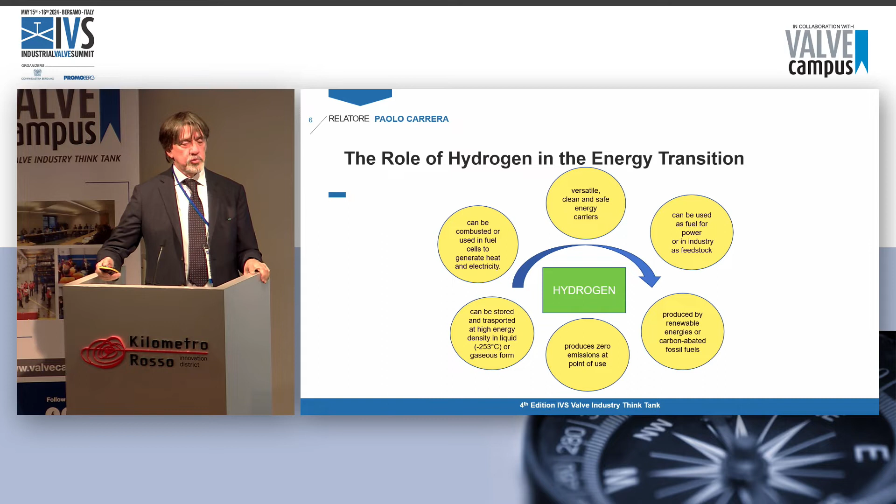It can be used either as fuel or as feedstock by the industry. It can be produced either by renewable energies or by carbon-abated fossil fuels, methane, which is associated to CO2 abatement. It does not produce emissions at the point of use. It can be stored, it can be transported. It's highly efficient, both in gas and in liquid form. Finally, it can be combusted or used in fuel cells to generate heat and electricity, which means hydrogen is highly versatile.

Now, let's take a step back and go back to the net zero scenario. Right now, we are producing 94 million tons of hydrogen, and less than 1% is low emission H2. We want to double production, reaching 180 million tons, but the big challenge will be making sure that 50% of this production is low emission H2 production.

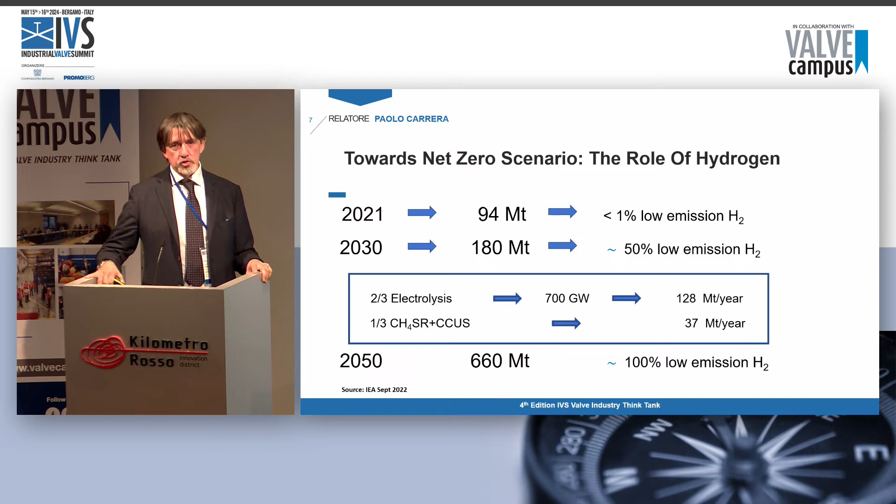This slide shows some of the challenges we have on the hydrogen market. So 180 million tons will be produced. 2/3 of it will be produced by electrolysis, and 1/3 of it will be produced differently. The electrolysis will lead to 700 gigawatts of installations. Right now, less than 200 megawatts have been installed across the world. The last line shows the 2050 targets, which means 7, 8, 9 times the current hydrogen production, and by 2050, all hydrogen should be green hydrogen.

Very ambitious targets indeed, but we must also boost demand. Decarbonization will be incentivized by increasing the production of hydrogen. Hydrogen access should also be boosted by creating the right infrastructure.

End users will have to be enticed to make use of hydrogen. And of course, costs will have to be reduced. We need economies of scale to make sure that this new form of energy is compatible with current methane costs. What can the government do, and what's the role of the private sector?

Well, first of all, governments need to boost this energy transition by enforcing different types of mechanisms. For example, financing plants, or reducing taxation, or increasing taxation on CO2, reducing taxation of hydrogen.

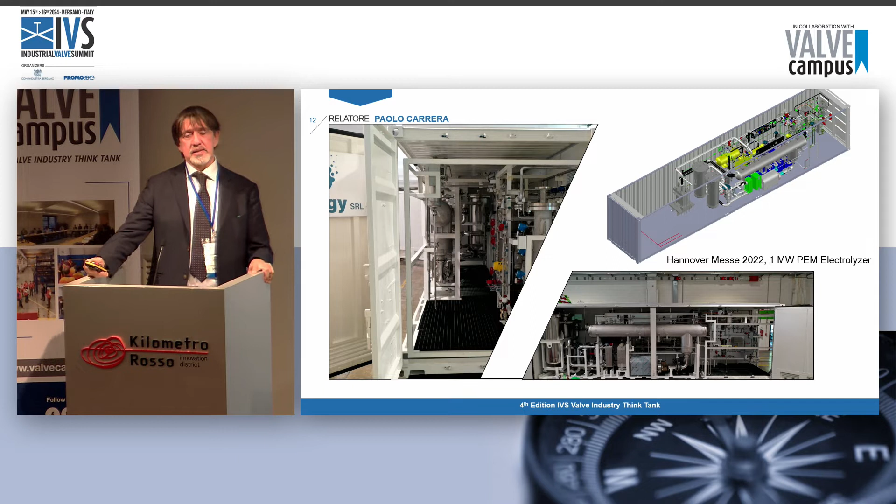Well, I'd like to tell you that we are investing a lot in research and development. We have a highly advanced hydrogen laboratory, probably the most advanced that we have in Italy. We aim at innovation. We do catalyzers, membranes, we study materials. One thing will be blending with methane, but another thing will be producing materials that are compatible with hydrogen. We were among the very first to take an electrolyzer, a PEM-based electrolyzer, to the Hannover Messe, which is the reference exhibition in the industry.

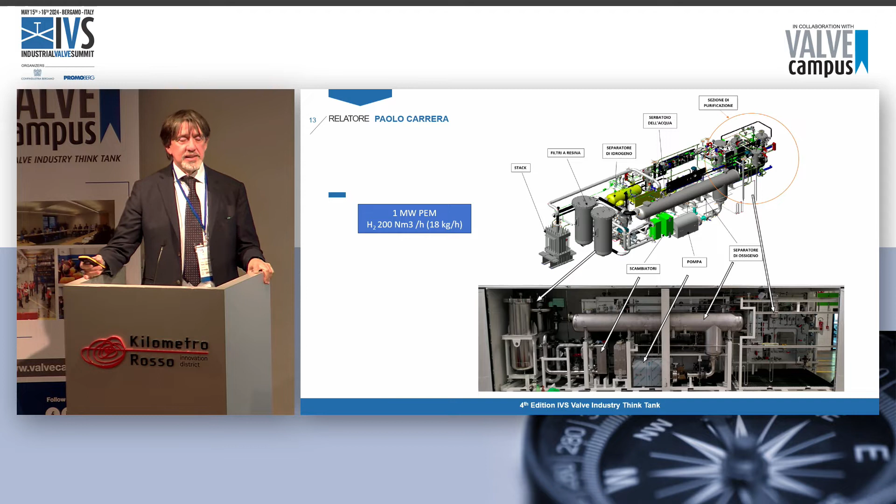This slide, well, I am not going into too many technical details, but we know that the most consolidated technology is the alkaline technology. But then you also have the PEM technology. We are investing in a halfway technology, taking the best of both worlds.

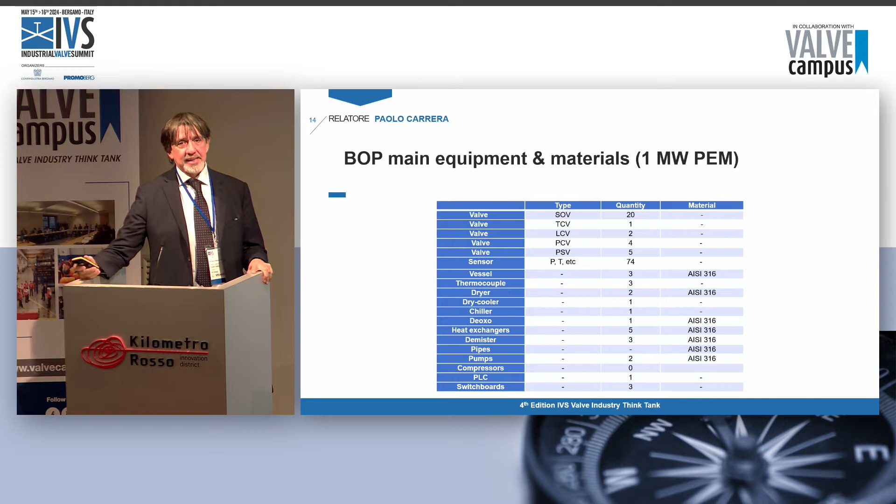Well, in this slide, you can appreciate how complex a PEM piece of equipment is. A normal, traditional plant can fit a 40-foot container. You can see that you have every type of valve, actually, in big quantities. This refers to 1 megawatt, 1 PEM megawatt. You see everything, thermocouples, chillers, deoxo, heat exchangers. So you see how complex it is. And you will also appreciate the fact that we're talking about noble materials. We know very well that hydrogen-based plants can be quite aggressive.

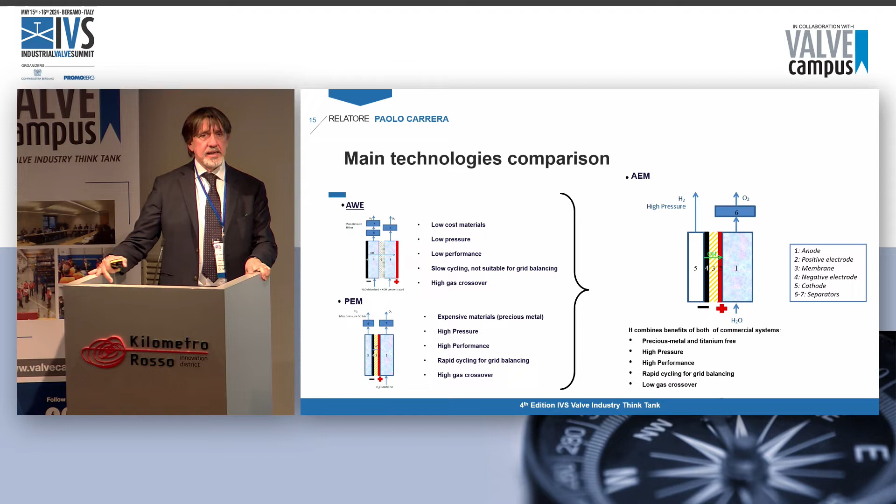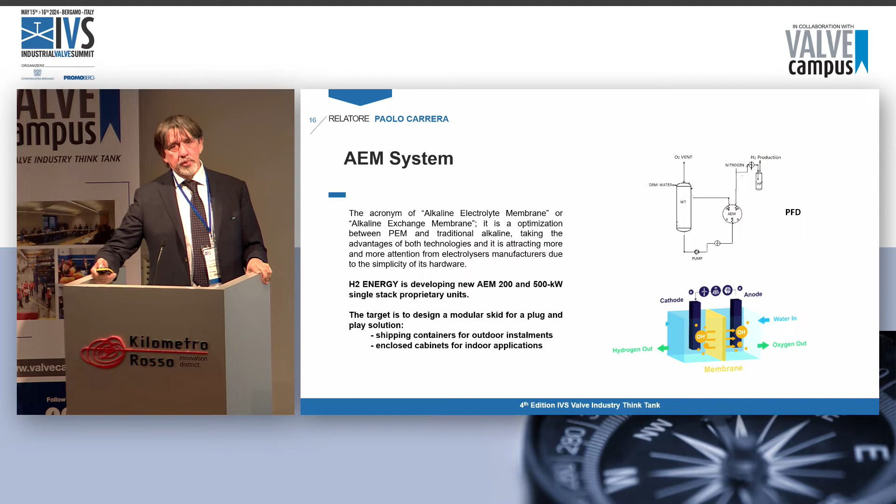I don't think there is any need for me to dwell too long on this slide, but this again proves that we are now moving towards this AEM technology, the anion exchange membrane, which tries to use some of the benefits of alkaline-based systems, which is the value for money aspect. We are now developing a new AEM, 200 and 500 kilowatts. We are also working on cells in order to improve their design and also to contain the BOP costs.

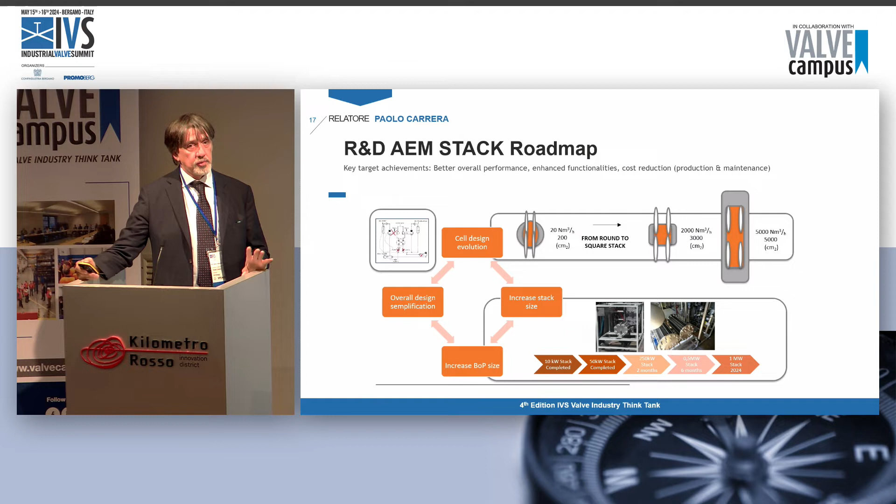So the take-home message is that innovation will be crucial in this sector, and it will really be the main driver. I'd like to conclude mentioning this quote by Professor Benson, who's a teacher at Stanford University. Basically, he's saying we cannot sit back and wait because it will take a long time. We should not be afraid of these long-term targets. It's not a race. This is actually a marathon that many countries have already embarked on. Thank you very much.

Thank you very much. Your presentation is useful also as an introduction to what will start in a few seconds, because I'll give the floor to Valentina Depetri from Wood for a focus on hydrogen and on the path towards the sustainability of the supply chain supported by Wood, with the support of other companies working with Wood. And the objective is that of bearing witness of how such complex challenges, difficult and long ones in such a marathon, allow us to work better by cooperating with other companies in the supply chain, because this can give better results. And so I give the floor to Valentina Depetri, who will present his ideas, his projects.

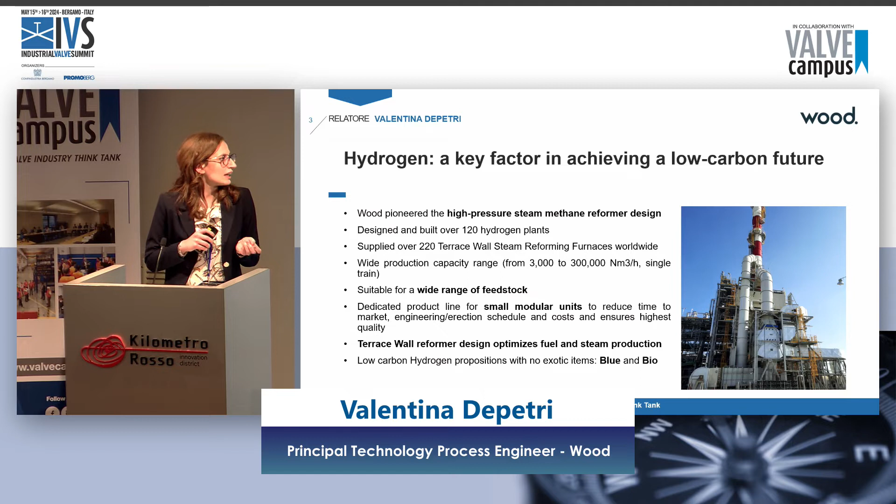So, as already said, the possibility of producing hydrogen in a competitive and sustainable way is one of the most important topics of international and national debates on energy transition, and it is the objective of this presentation. The possibility of using molecular hydrogen in sustainable processes does not have particular technological limits, as we will see in my presentation. Molecular hydrogen is mainly used in oil refining processes and petrochemical processes. It is produced at large scale thanks to reforming technology from fossil fuels.

This is the terrace wall steam reforming furnaces. This allows us to have a uniform thermal reaction where the catalytic reaction takes place and optimizing the consumption of fossil fuel and the production of steam.

To produce hydrogen in a sustainable way, however, it's not just important to optimize the consumption of feedstock and fuel to reduce CO2 emissions, but it's also important to supply solutions which allow us to reduce the time and the cost for setting up these plants. And that is why a possible solution is this low-carbon hydrogen proposition which we propose.

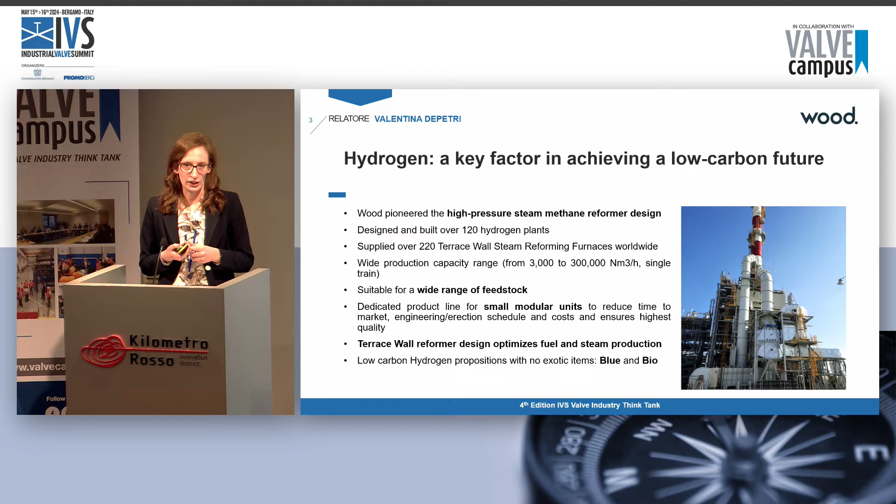To produce hydrogen in a sustainable way, we have developed within our group two different approaches of alternative technologies which allow us to respond to the needs of energy transition, that is blue hydrogen and biohydrogen. According to the raw material and to the supply of energy associated in the production of hydrogen, we have given hydrogen different colors.

We range from green hydrogen, which is produced by the electrolysis of water through renewable sources for electricity, or we have blue hydrogen, which is produced by hydrocarbon feedstocks, which are typical of the grey plants, but they are integrated with a CO2 capture system, which allows us to reduce the CO2 emissions of these plants.

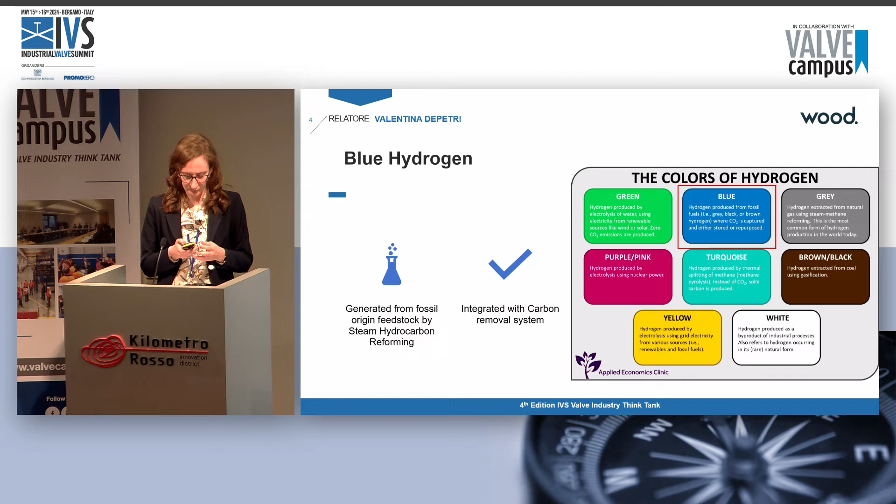To produce blue hydrogen, we have developed two different technologies, or shall we say, we've optimized our technology with two interpretations. It's important to remember that both of these technologies allow us to reach up to 95% of recovery of CO2 produced within the plants, and so consequently up to 95% of CO2 emissions reduction.

Integrating within the steam reforming technology a system for the capture of CO2, which is called pre-combustion capture, for the syngas produced within the plant.

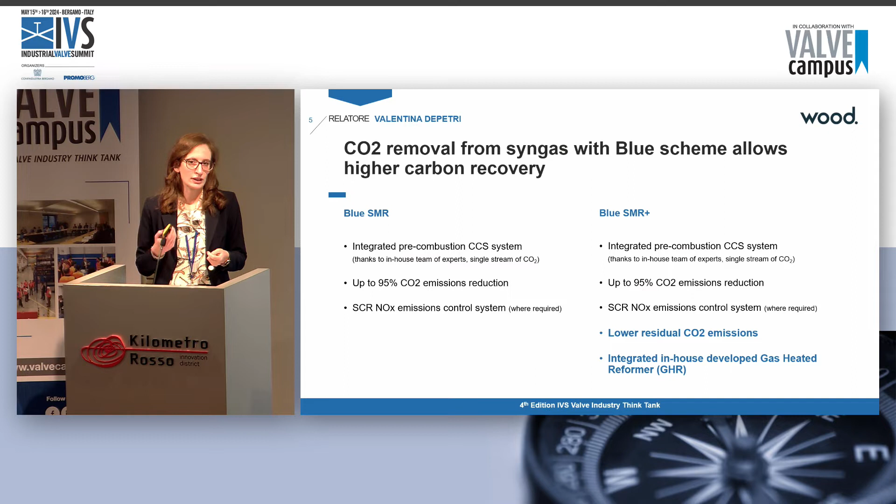The second interpretation of the blue hydrogen technology is called Blue SMR Plus, and it foresees the integration within the steam reforming process of a new piece of equipment which we have conceived, planned and tested, and which allows us to reduce the residual emissions of CO2, reducing the carbon footprint of this technology. This is the so-called GHR reformer, gas-heated reformer.

What is the gas-heated reformer? This is simply a vertical heat exchanger within which we have tubes of catalytic material, of catalyzers, in which the steam reforming reaction takes place. And the necessary heat for this reaction to take place is provided by the thermal exchange between the fresh feed, which enters the exchanger, and the reaction product, which happens in the furnace downstream in the GHR.

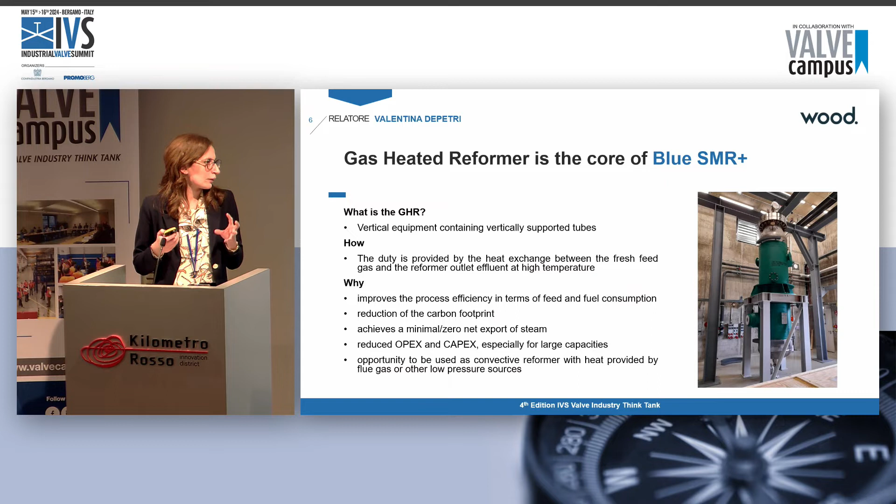It is possible to have other integrations and to use this equipment on a convection basis using hot, low-pressure currents with fumes. The advantages of this technology, SMR Plus, are an increase of process efficiency in terms of feed and fuel consumption, a reduction of the carbon footprint, and not just a reduction of the fuel, but also reduction of the steam produced within the process, improving thereby operational costs and investment costs too, and this above all with large capacities.

The GHR has been tested in a pilot plant, which is in Jülich in Germany, through the positioning within a plant of this system, which foresees a solar integration. It is installed inside a test chamber in this tower, which is 33 meters from ground level, and which produces 127 normal cubic meters per hour of dry syngas. And this thanks to our partnership with Synhelion.

Unfortunately, the microphone is not working. Now it is. Quite loud, actually.

Talking about Synhelion and the test on this GHR system, I'd like to introduce Gianluca Ambrosetti, who's the CEO and co-founder of Synhelion, which is a Switzerland-based, Ticino-based company which has developed a technology for concentrating solar light that is then used to convert raw materials into liquid fuels. So this is something we know very well, but instead of coming from a hole drilled in the ground, coming from something much more climate friendly, which is the sun.

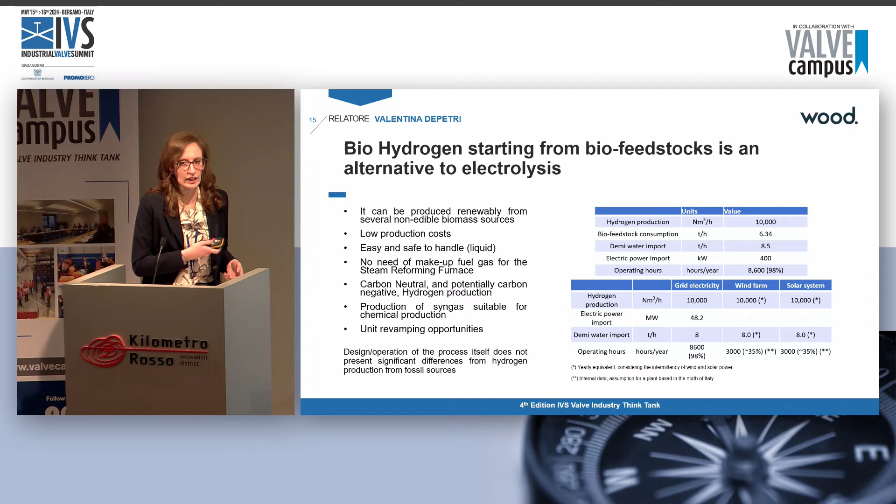Moreover, as this is a new optimization of the steam reforming process changing the feed, we can say that the planning and design of these plants does not present particular differences from H2 traditionally produced from fossil sources. And that's why it's very interesting to apply this to revamping and decarbonization projects of existing plants.

As for the state of this technology, we can say that the real challenge is the chemical part, because the reforming of these heavy liquid bio feeds can lead to carbon deposits. And so we have to use the technology in such a way as to avoid this issue, this problem.

We've carried out different tests on 3 different feeds in a lab. We are now in the initial stages in designing a pilot plant. The tests were successful, and so we are also developing the next stages in order to be able to commercialize, to launch this technology on the market.

For biohydrogen, we have developed, together with Symlogik, an economic assessment, which allows us to calculate the production cost of biohydrogen according to the market and the geographical area. Moreover, the tests carried out in the lab were carried out thanks to a strategic partnership with Clariant, which has provided us with the catalyst.

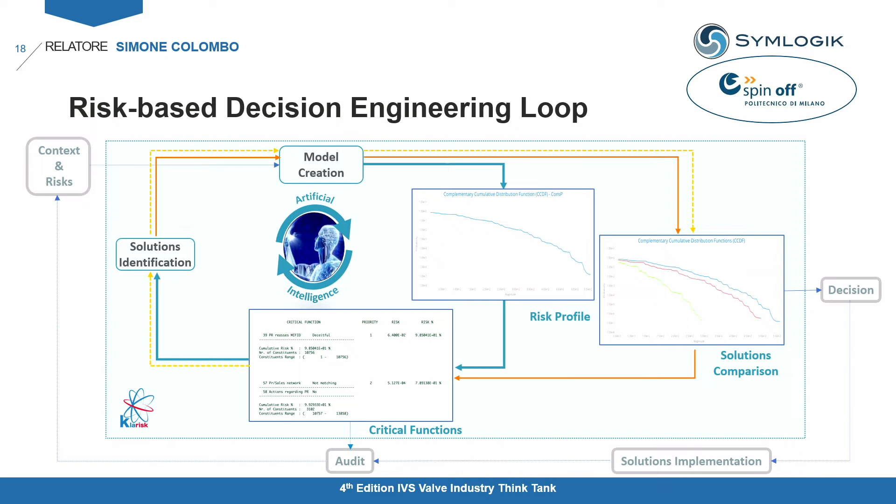This is the only decision which might interest you. I put 2 or 3. So here we just show how it works. We recreate this model, enhancing all the different competences and enhancing data if it's there. We do analysis. After that, we see which is the level of uncertainty or risk associated to the parameters which are important. And then what do we do?

It's not enough. We have to engineer the decision. We identify, on the basis of the criticalities identified, which are possible solutions. We try to implement them to start the simulation again to see if they're truly efficient or not. So that's what we do.

That's it. That's all. Thank you, Simone. Thank you, Simone. Extremely clear. Well, there was no need to show the slides, as a matter of fact, because you had been so clear yourself.

Today, here we have representatives from the valve industry, meaning people that on a daily basis take very hard decisions against a highly indecisive market. Could you give us an example of how you could help these people take their decisions? Let's say there is this new market that has to do with the energy transition and with hydrogen. I imagine new products will be developed. For example, valves, new valves. Well, how can this scenario be supported by you at Symlogik?

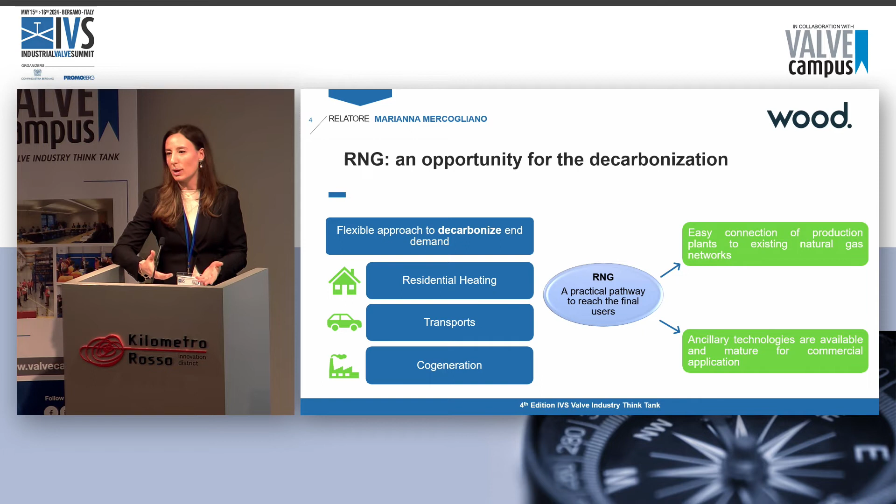Another important advantage of RNG is that all the technologies which are normally used in the gas supply chain, that is, smell systems, drying or purification of gas technologies, already exist. They are already mature. They are already introduced in the gas supply chain and must be put into context again. But it's not anything new.

You must have understood the main advantages of RNG, and these have attracted the attention of governments and institutions who are supporting the development of this new technology. The European Union, with the REPowerEU program, which concentrates on the decarbonization of the energy field, set as a target for 2030 the increase of biomethane and RNG to 35 billion cubic meters. It's not a target left by itself, because together with this, it has fixed a series of incentive mechanisms to support all those initiatives wishing to promote this type of technology.

And then each country of the Union applies measures individually in its own jurisdiction. In Italy, we have the Recovery and Resilience Plan. I'm speaking of Europe, of course, because it's the context which is closest to us. But there are mechanisms of this type in other countries, especially in North America.

Let us now turn briefly to the main production pathways of RNG, renewable natural gas. There are three main alternative paths: biogas upgrading, power to gas, and production through an intermediate step, which is gasification applied to various sources. In the case of biogas upgrading, biogas obtained from the fermentation of organic vegetable or animal residues is treated with hydrogen. To guarantee the sustainability of the process, it should be hydrogen produced in a renewable way. And in this way, through a process which we call methanation, we obtain the production of RNG.

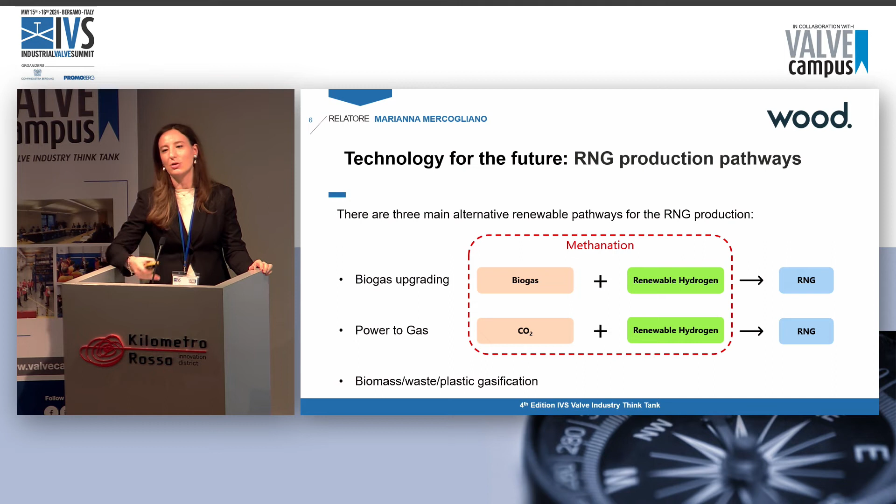In a similar way, in power to gas, renewable hydrogen, instead of reacting with biogas, is combined with CO2, and the process is always called methanation. Obviously, these are very simplified indications to show you the different elements involved, but there are intermediate stages I didn't report here for purification and treatment of the gas.

And then the last approach is through gasification. In the case of gasification, biomass feed or waste, even municipal waste or plastic, is treated with a thermochemical process, which is gasification, to obtain syngas. Syngas is a gas mainly made up of CO2, hydrogen and CO, which is very important for the production of different forms of energy. And we apply a methanation process, which is promoted through special dedicated catalysts, to obtain renewable natural gas.

I wanted to attract your attention above all to the fact that gasification in recent years is becoming increasingly present in the energy scenario, and it offers great flexibility because it acts as a bridge between a residue, which is biomass or waste, and a form of energy. And it has the great advantage of offering energy forms to all those places where these natural sources of energy are not available. And this refers to energy security, one of the topics mentioned at the beginning of the meeting. This is a very important point.

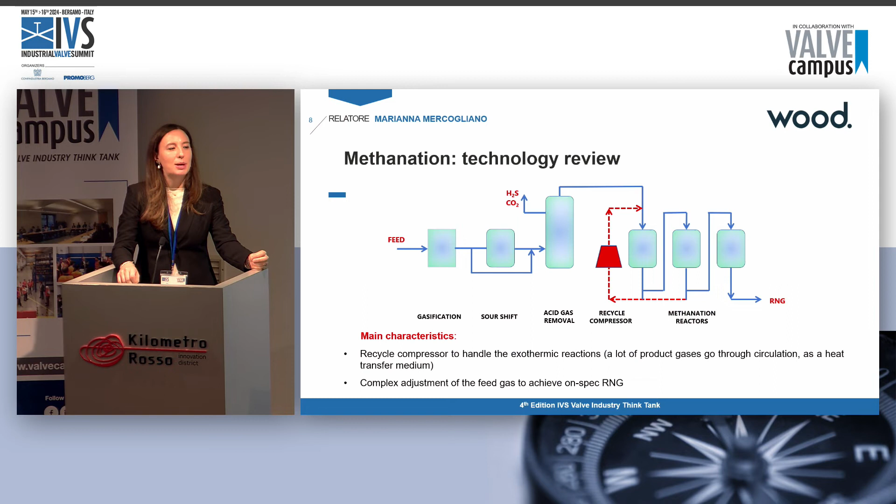Wood positions itself in the field of methanation with a technology called Vesta. The Vesta technology is a once-through technology. It does not foresee any recycling. Perhaps the suppliers of compressors are not very happy about this, but in this case, we do not have a recycle of products, but this thermal effect, advantage effect, which allows temperature to be limited, involves CO2, which is released, and also steam, which is injected within the reaction system.

So these two components together allow us to eliminate from our process setup the compressor, which implies, of course, great savings in terms of capex and also operational costs for the plant itself. Moreover, this is a very flexible system which does not require, because of some of its specific characteristics, a strict control of the composition of the gas upon feed.

Here too, I'd like to go back to a concept which was already mentioned in the previous presentation. These are systems which, in terms of equipment, do not have technological complexity or revolutionary equipment or something extremely new or complex. We are speaking of fixed bed reactors, control systems which are traditional with valves, control loops and tools which industry already knows about and which must only be positioned within a new process.

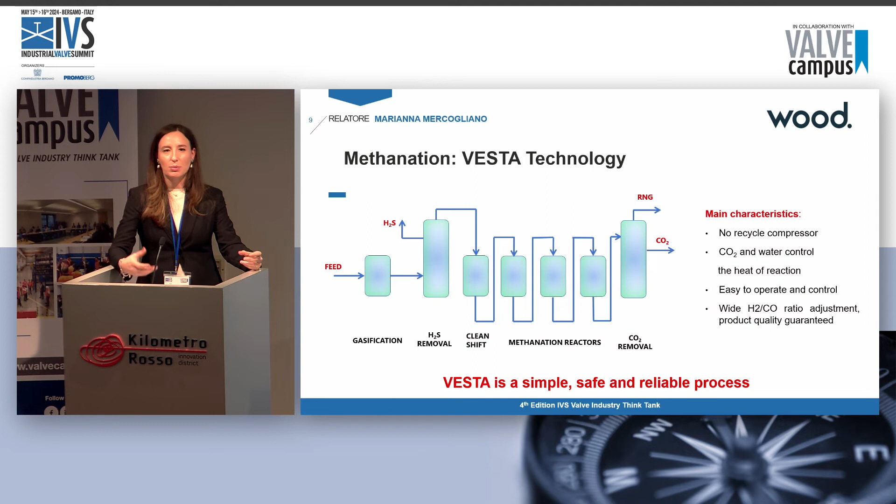As Wood, we have carried out numerous basic design packages for a Vesta technology. A pilot plant in China was set up a few years ago and in all the test campaigns has successfully demonstrated production. And we also have a demonstration plant in the UK financed by the Transport Department of the UK, which will use RNG from biomass gasification.

What I haven't said yet is that the Vesta process also comes from a fundamental cooperation agreement with Clariant, which has developed, thanks to its experience in the field of methanation, its own proprietary catalyst, which is used within methanation reactors and which offers great performance levels in terms of conversion vis-a-vis the end product. Not many examples of carbon deposition and less complexity in all the different operations.

That's all I want to say. I give the floor to Andres, who's more expert than I am on catalysts. Well, Marianna, you are taking my job away. You've spoiled our key guest, Jeffrey, and you've also introduced Andres.

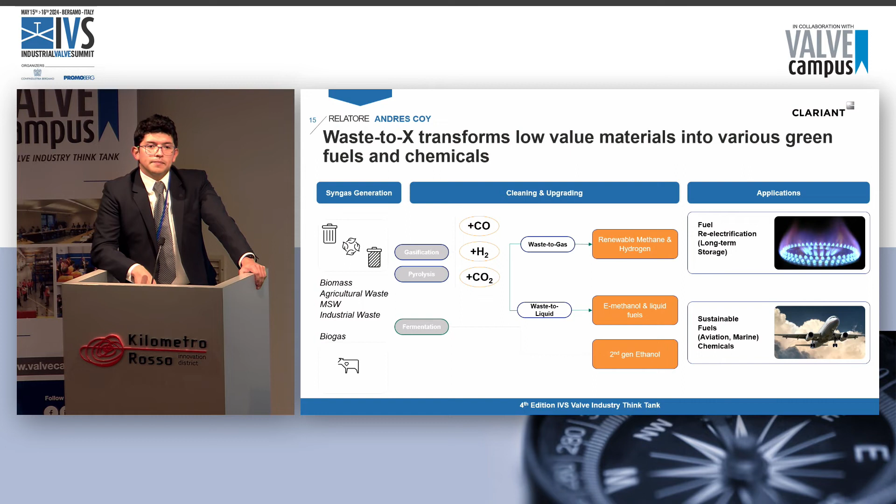Thank you, Andres. Well, it's a good point that at the end there was the second generation ethanol, because it recalls our biohydrogen production technology under development, because it's basically the feedstock to our biohydrogen production technology. One question to you, Andres. In all these processes, Clariant is basically the scientist. What is the biggest challenge you face when we take the phone and we say, Andres, we have this opportunity downstream of this kind of gasification, we have this syngas quality. What is your headache, let me say?

Okay, that's a really good question. Whenever we are dealing with these non-traditional feedstocks, we usually find different kinds of contaminants, and we need to address that in order to protect the catalyst lifetime. So whenever you call us, despite that we are producing the same product, for example, methane, every project is a customized project.

Because it depends a lot on the feedstock, and we can say that we are producing methane from woody biomass. But depending on the kind of woody biomass, we will have a different setup for the purification stream and also the catalyst layout. So that's the biggest challenge that we're facing, that everything is customized. We cannot apply one general solution for everything. So again, the message is that we talk to each other and we try to find the solution, basically.

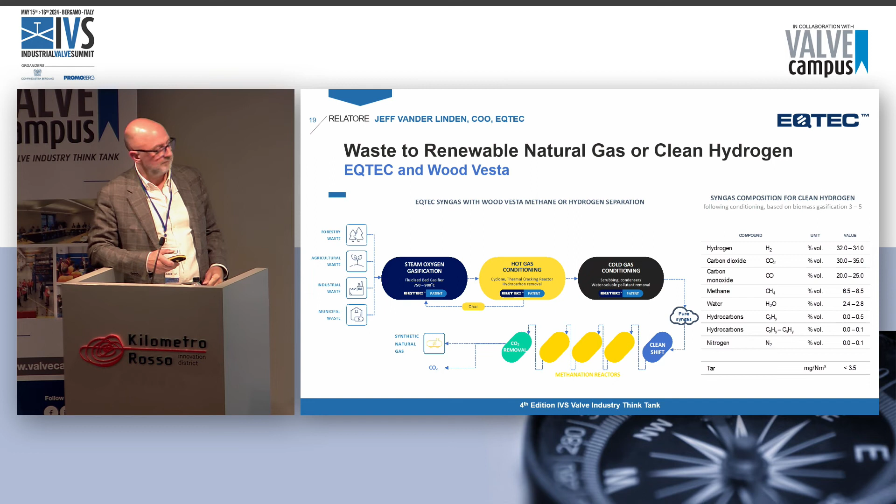So I think what I want to close on, having introduced kind of what we do and why it's different, is to say that the business model impact on this is quite significant. What we're starting to see more and more of is, and I think some of the earlier presentations alluded to this as well, fewer large-scale centralized facilities and many more highly localized, small-scale facilities. If we're going to create waste, leave it where it is.

So if you're running a large manufacturing plant, a steel manufacturer, we are working with Toyota, for example, in the UK, a car engine facility is what we have there. Leave the industrial waste on site. Don't move it. Right? Leave it there and right size a plant that fits the scale of what you need there. So that's one big thing we're seeing, and there's 3 examples there, one of which I mentioned in Italy, where we are building where the feedstock is located.

The other one is, build one at a time was the old way of looking at it. Now we're talking to state and provincial governments about sponsoring many plants. So California is a good example. We see as many as 30 plants in the pipeline in California. All of them are 2 to 3 megawatts in size, same design, same build, same rollout, and we can move at scale to do that quickly. So that's another change that we're beginning to see.